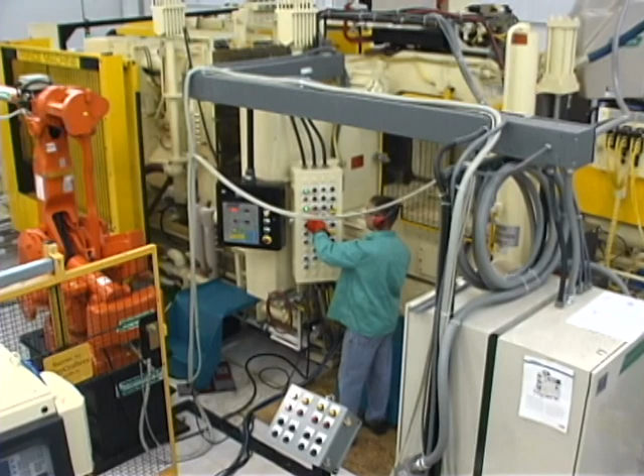This video has been produced and distributed by the North American Die Casting Association to assist in improving safety in die casting facilities. The injury rate for the die casting industry is approximately 2 times the rate of other private industries, as reported by the U.S. Bureau of Labor Statistics. Several hazards exist in die casting facilities that can cause serious injuries such as burns, slips and falls, strains and sprains, eye injuries, fractures, and cuts.

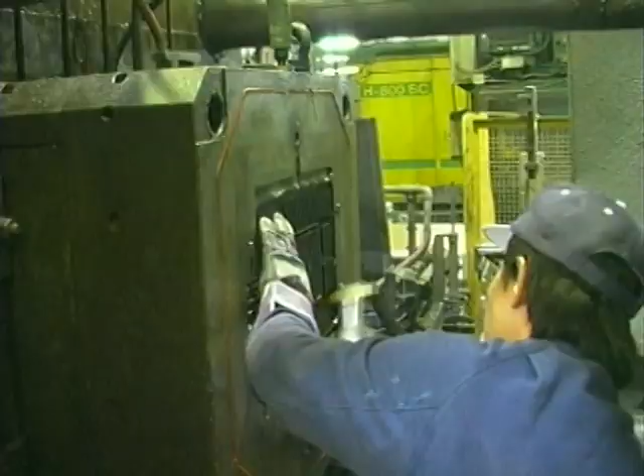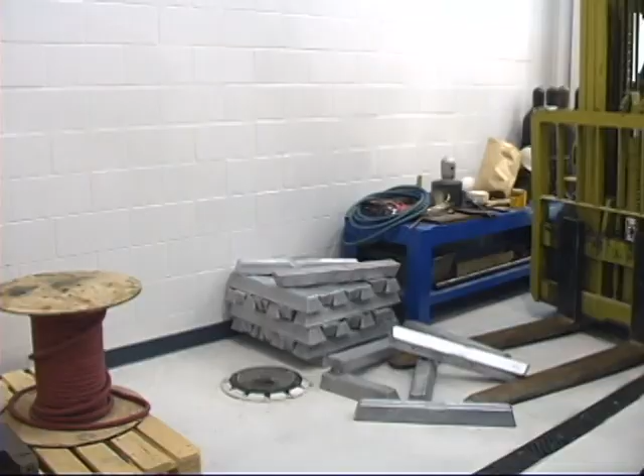You should pay very close attention to the detail presented in this video and follow all safety rules established by your plant to prevent injuries to yourself and others. Heat from molten metal, castings, die casting machines, die casting tools, hot oil, chemicals, flash from castings, the wrong mix of materials, poor housekeeping. Studies show 96% of all accidents are caused by unsafe acts, something somebody didn't do correctly. That means most accidents are avoidable.

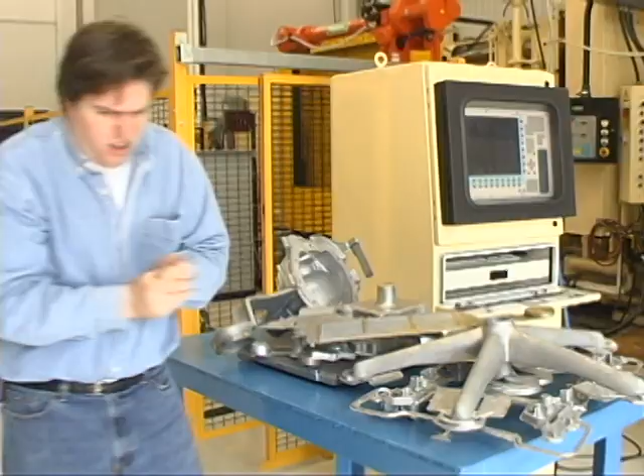Failure to perform your job in a safe manner isn't an option. There's simply too much at stake when you let safety slide. Safety is everyone's responsibility, and this video will help you do your part by providing communication on lockout-tagout procedures, personal protective equipment, metal melting and handling, die casting machine guarding, hazard communication, and housekeeping.

One of the worst die casting disasters of all time happened because safety procedures weren't followed. People died. People were seriously burned and injured, and people lost their jobs. More common to die casting operations, but no less important to avoid, are sprains and strains, bruises and cuts, fractures, and heat burns. Because simply, it's good business when everybody stays healthy and injury-free.

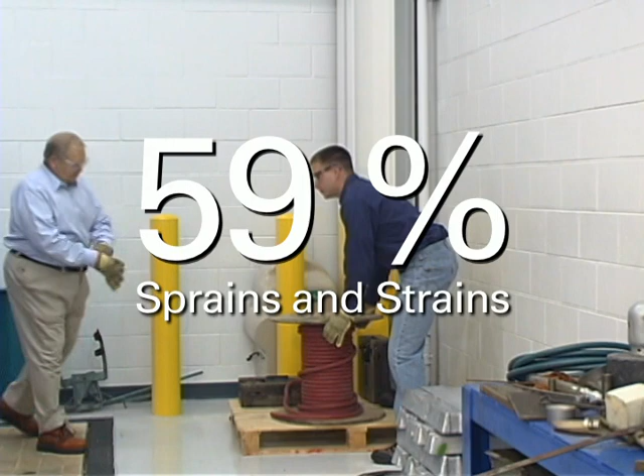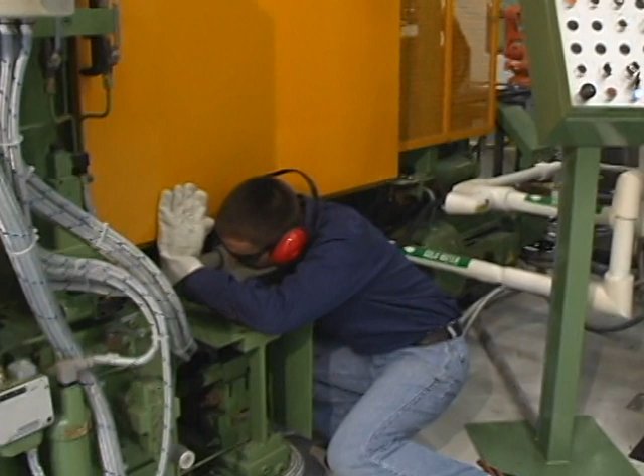Sprains and strains are usually caused by overreaching and improper lifting. If a job requires moving heavy material, ask for help and use the training you've been given to avoid sprains and strains. Bruises and contusions are often caused while using hand tools or by moving machine components. If you're working around moving equipment, keep your hands, arms, and body from harm's way. Don't place your hands or arms over, around, or through safety guards. And when handling castings that are heavy or have sharp edges, use caution and wear proper personal protective equipment.

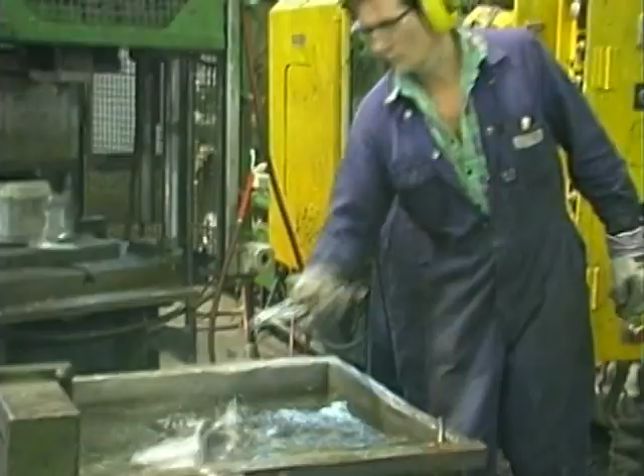Fractures are often caused by slips, falls, and moving equipment. That's why it's always important to keep your work area clean, organized, and free of water and oil. And use caution when you're working on equipment, especially above the machine platform, and don't reach around machine guards.

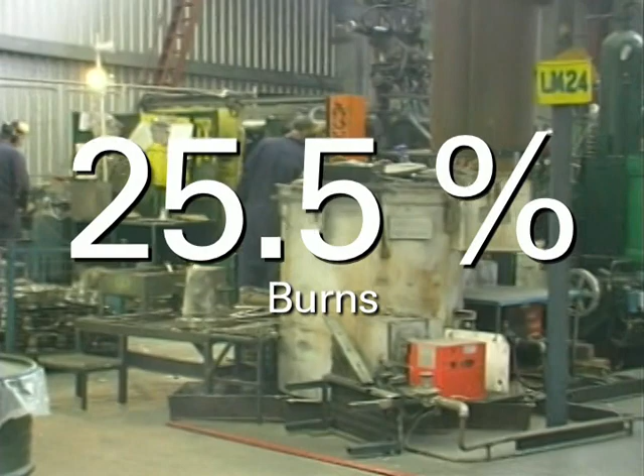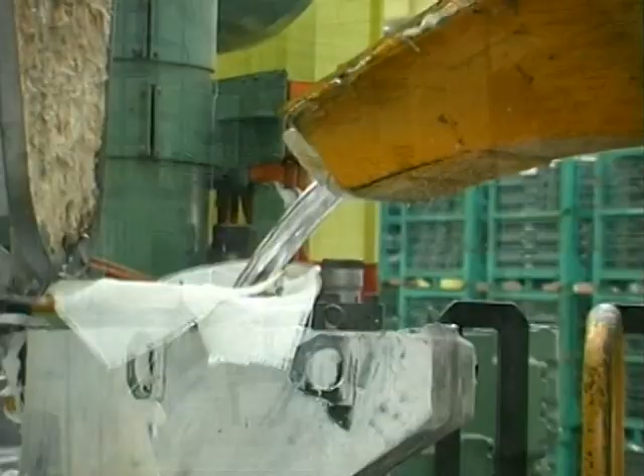Die casting dies, hot motors, hydraulic pumps, hoses and piping, molten metal holding furnaces, and transfer ladles get hot and can cause serious burns. Wear personal protective equipment when working with or around hot materials, and keep a safe distance from molten metal to avoid being burned from splashing metal. If you handle castings, wear the right kind of gloves. It only takes a moment for a serious burn to happen, so assume that all castings are hot, because you can't tell by looking at a casting whether it's hot or not.

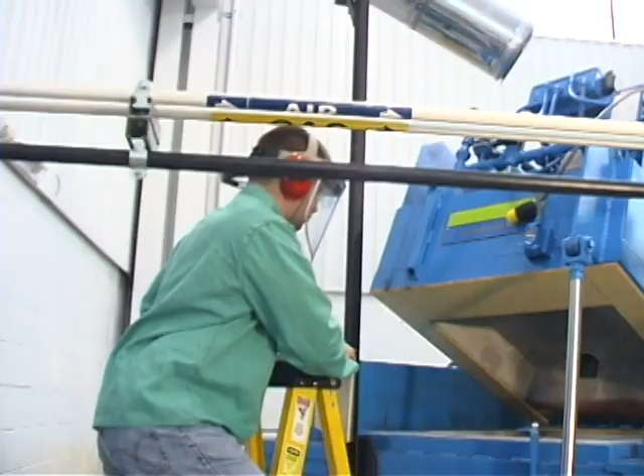Every employee in a die casting operation must be trained concerning the safety rules to work safely, to audit their work area for safety hazards. They should correct or report safety hazards and watch out for their co-workers' welfare. Identifying, reporting, and correcting unsafe acts and conditions greatly reduces the potential for accidents, injuries, and damaged property.

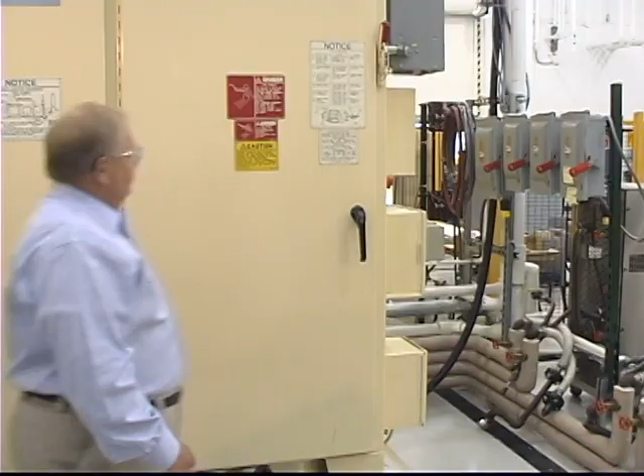OSHA's lockout-tagout standard helps ensure safety on and around powered equipment. This OSHA standard identifies 3 classifications that determine to what extent employees are affected by lockout-tagout requirements. Authorized employees are the ones who lock or implement a tagout system procedure on equipment for servicing or maintenance. Authorized employees must have thorough knowledge of the machines they work on and the lockout-tagout requirements that go with them.

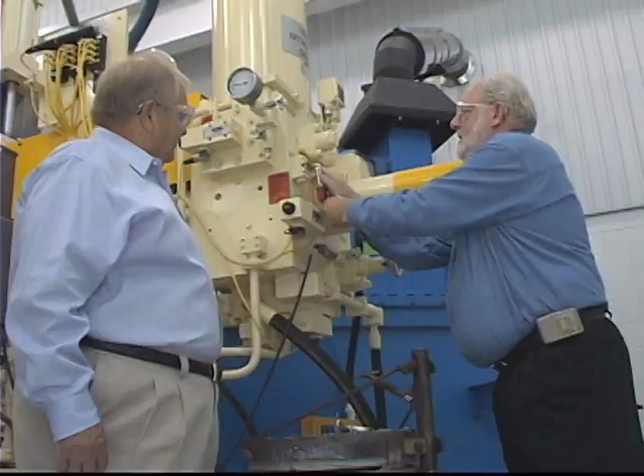The affected employee is one whose job requires them to operate or utilize equipment and understand lockout-tagout requirements to avoid hazards for maintenance personnel. Other employees are those whose work may require them to be in the areas where energy control procedures exist. They are not directly responsible for operating or performing maintenance on equipment.

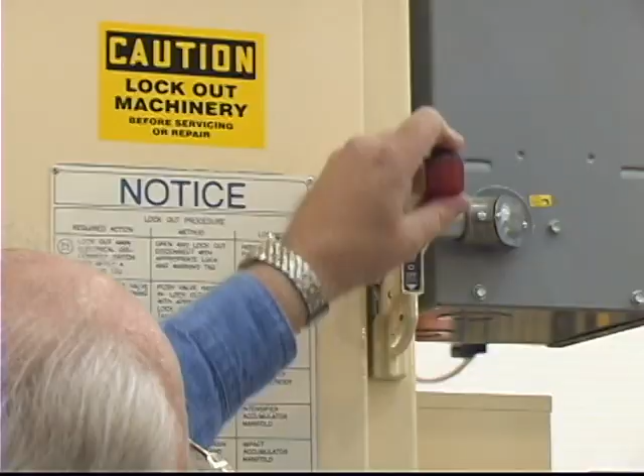Lockout is the preferred method of control and provides the greatest degree of protection for the employee working on the machine. If work is required on equipment that will not accept lockout devices, tagout is permitted. All lockout-tagout procedures must be followed even if no one is in the work area when the work begins. Many times, employees enter the work area after maintenance procedures have begun, and lockout-tagout procedures ensure that these employees do not accidentally energize the machine.

The fundamental rules that everybody must understand about general energy control procedures are that all equipment must be locked out or tagged out to protect against accidental or inadvertent operation, and that no one should attempt to operate any switch, valve, or other device that is locked out or tagged out.

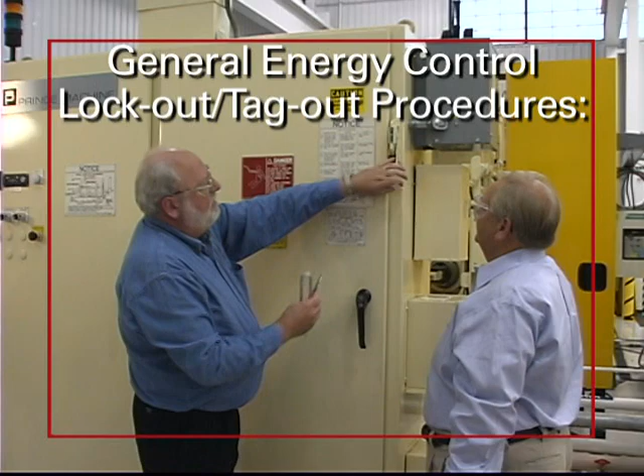To perform a lockout or tagout under the general energy control procedures: 1. Notify all affected employees. 2. Deactivate the equipment to be serviced using normal shutdown procedures. 3. Isolate the equipment from its energy source. 4. Lock out or tag out all energy isolating devices on the equipment.

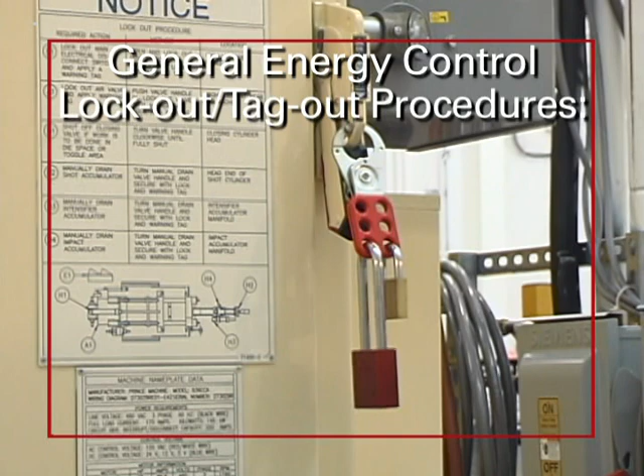5. If the maintenance procedure involves more than one person, each person must place a personal lockout or tagout device on the energy isolating device. For multiple locks, a multiple hole hasp must be used. 6. Make sure all personnel are not exposed to potential injury from the equipment. 7. Check the zero energy state of the equipment by attempting to operate the equipment to ensure that it will not operate. Return all controls to neutral or off after trying to operate the equipment.

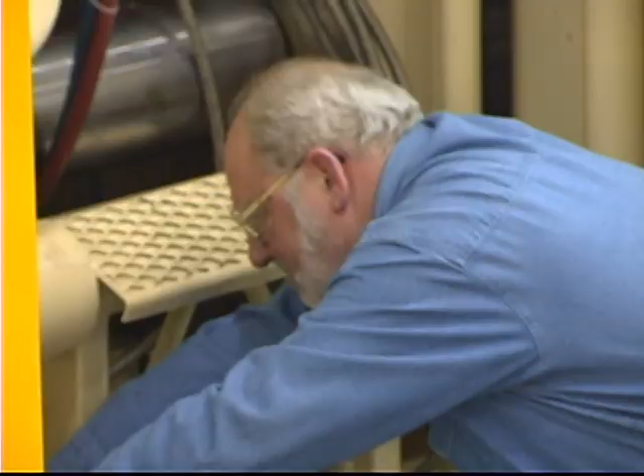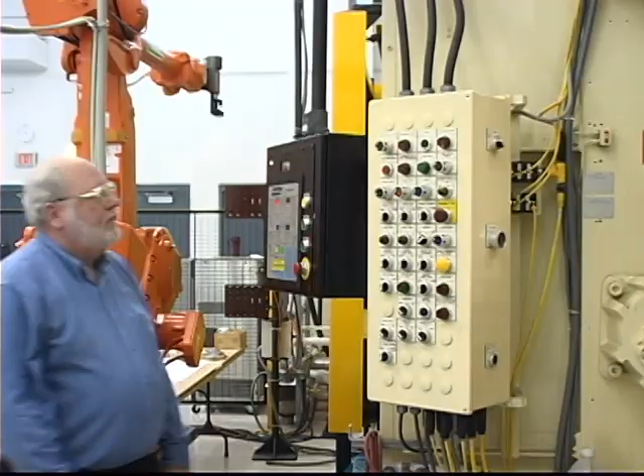When the service or maintenance job is done and prior to starting the machine, employees must first remove all tools and reinstall machine guards. Check the area around the equipment so that no one is in an exposed area. Remove all lockout-tagout devices, and operate the energy isolating devices to restore energy to the equipment.

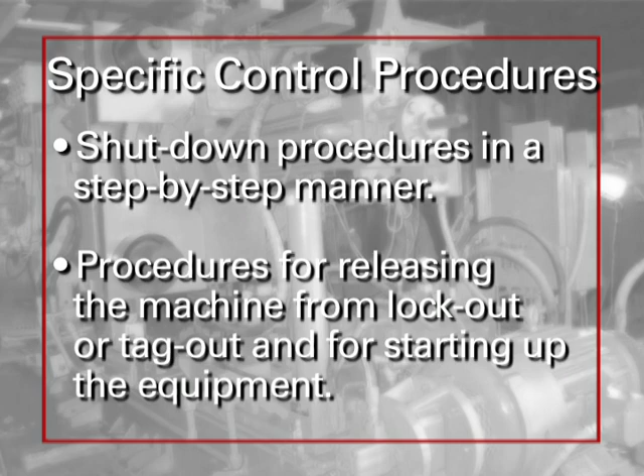Specific energy control procedures affect most equipment used in die casting operations. They include identity and description of each item of machinery or equipment, the listing and description of controls and sources of energy, shutdown procedures in a step-by-step manner, and procedures for releasing the machine from lockout or tagout and for starting up the equipment must be provided.

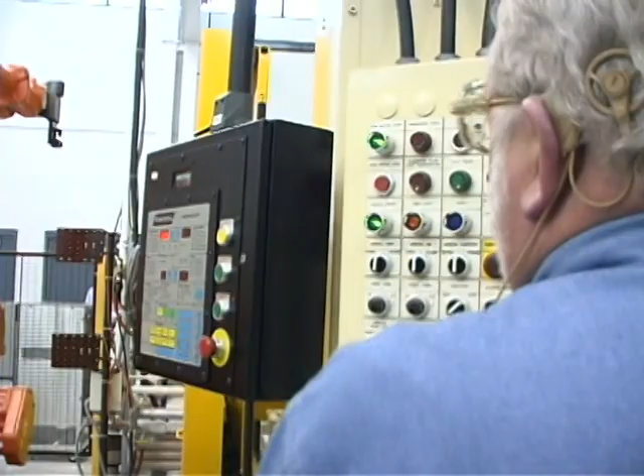Training on lockout-tagout procedures varies according to employee classification. Authorized employees must be able to recognize hazardous energy sources and the type and magnitude of energy at the job site, and how to isolate and control them. Affected employees must understand the purpose and the use of energy control procedures or equipment they operate, or where the energy source is located in their work area. Other employees should also be trained on energy control procedures for equipment they operate and be prohibited from restarting equipment that is locked or tagged out.

OSHA requires the use of personal protective equipment to help keep employees safe. Management and shop floor workers as well must understand what personal protective equipment is available and how to properly use it. Basic personal protective equipment that should be worn by everyone working in the die casting area of the facility includes safety glasses with side-eye protection.

Eye and face protection must cover the front and the side of the eyes and face and includes safety glasses, goggles, face shields, welding helmets, and full hoods. Employees who wear contacts or glasses must wear goggles or other eyewear meeting ANSI standards or prescription safety glasses. Face shields and welding helmets are considered secondary protection. They must always be used with safety glasses or goggles in order to provide adequate protection.

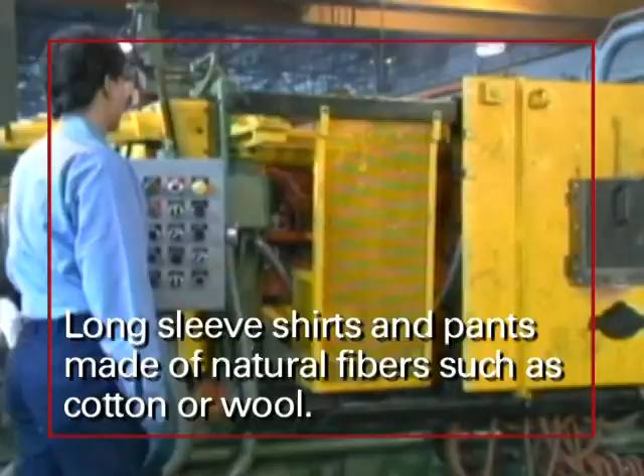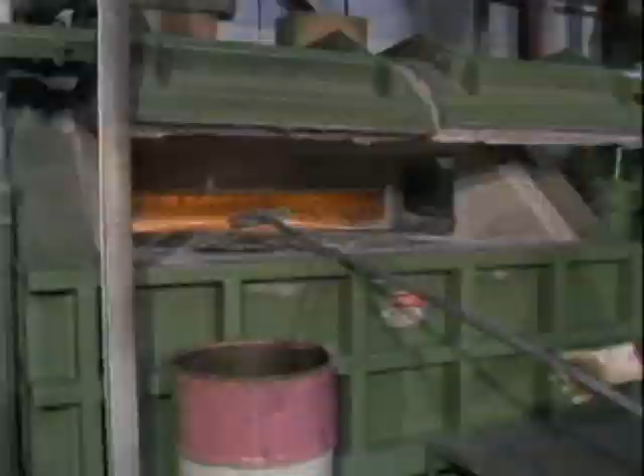Long-sleeve shirts and pants made of natural fibers such as cotton or wool, and steel-toe safety shoes. Hearing protection, hard hats, bump caps, and metatarsal protection may also be required for additional protection. Personnel handling and transporting molten metal may require additional specialized personal protective equipment, including leggings and spats for protection from sparks and burns, fire retardant or reflective jackets and gloves, hard hats with face shields to deflect intense heat and flying debris. It's essential that each employee also avoids contact with gloves or boots that have been used with hazardous chemicals. All new employees must be trained on proper use and maintenance of personal protective equipment.

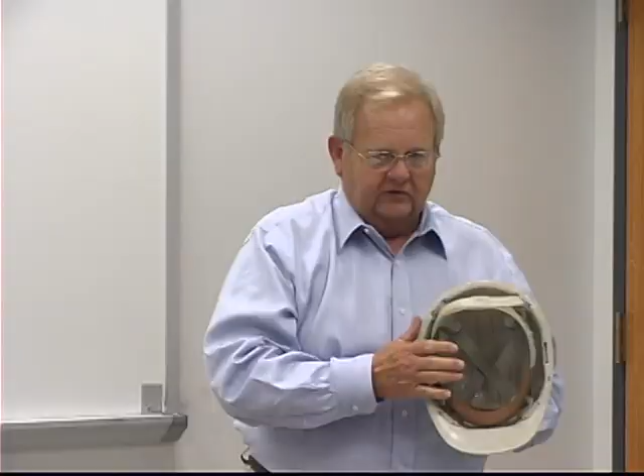Head protection is also required in die casting facilities. Hard hats consist of an outer shell and inner suspension. The shell provides resistance to impact and penetration of a falling object, and the suspension acts as a shock absorber to keep the shell at least 1 inch above the wearer's head in the event of impact. The bump hat is a metal, plastic, or fiberglass cap shaped like a hard hat, but without a suspension system, so it does not provide adequate protection from falling or sharp objects.

There are 3 things that every employee should know about head protection. First, hard hats should always be inspected daily and always after an impact. The shell should be solid, with no cracks or obvious damage. The suspension should be checked for worn, torn, or broken straps or connectors. The shell and suspension should be cleaned regularly so they can be properly inspected.

Employees should not put stickers or paint on a hard hat. These changes make it more difficult to see any flaws in the shell. Store hard hats away from heat, impact, chemicals, or sun exposure. Don't put them in the back window of a vehicle or behind the seat of a truck due to possible impact damage.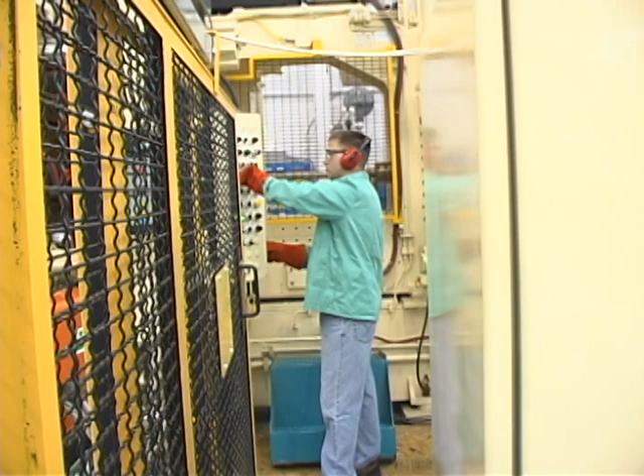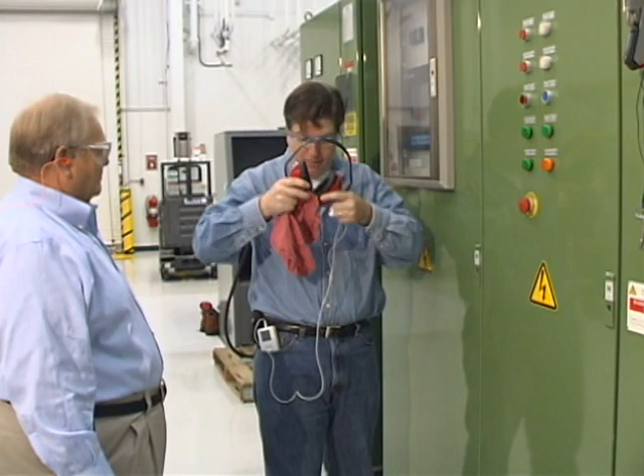Hearing protection may be a requirement in your facility. The two general types of hearing protection available are earplugs and earmuffs. Earplugs are ideal. They fit into the ear canal and provide a snug cushion against noise. Earmuffs are also effective at blocking out harmful noise. They create a sealed space around each ear, but hair, earrings, and eyeglasses can get in the way and limit their effectiveness. Personal stereos with headphones are no substitute for hearing protection and should not be used. Hearing protection should be inspected daily and be cleaned, repaired, or replaced as needed.

Foot injuries in die casting can be common and quite debilitating. Protective footwear made with a steel reinforced box toe protects the foot from being crushed. Safety shoes and boots should also have puncture-resistant soles. Work around chemicals may require rubber or synthetic footwear.

Toe caps, foot guards, and heel and ankle shields are also available for use in areas of work requiring extra protection. It's important to check safety shoes on a daily basis for wear, cracking or drying of leather, damage to grommets or fastenings, and damage to the soles. If shoes have steel toes, check inside the shoes to be sure the metal is not protruding from the lining.

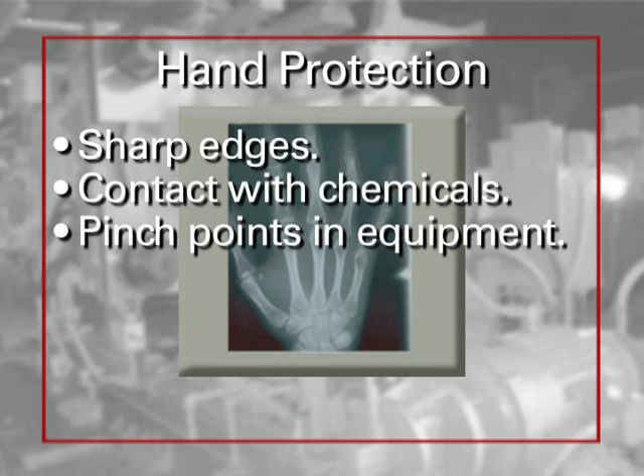Hands, fingers, and arms are injured more often than any other body part. The causes for those injuries include sharp edges, contact with chemicals, pinch points in equipment, abrasions, temperature extremes, and contact with electricity. Like footwear, proper fit is important with hand protection to allow for full movement and dexterity. Precautions to take when choosing the right hand protection include taping the top of the glove or sleeve or folding it to form a cuff to prevent chemicals from running down the arm and inside the glove or sleeve.

Vinyl, rubber, or neoprene gloves are good for use with most chemicals. A synthetic glove is required when working with petroleum-based chemicals. Metal reinforced gloves provide the best protection from sharp points or edges, but do not wear gloves containing metal when working around electricity or electrical equipment. Leather or cotton gloves are best for handling abrasive materials. Avoid using gloves when working around machinery, as moving parts can easily pull a hand and arm into the machine.

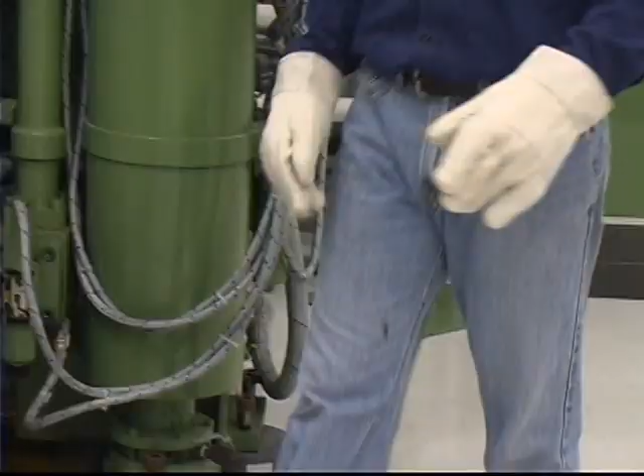Remove gloves or sleeves to avoid contaminating skin, clothing, or surroundings with anything on the outside of the glove or sleeve. Always inspect hand and arm protection daily. Look for holes, splits and seams, evidence of corrosion, or other evidence of wear and damage, and replace damaged gloves immediately.

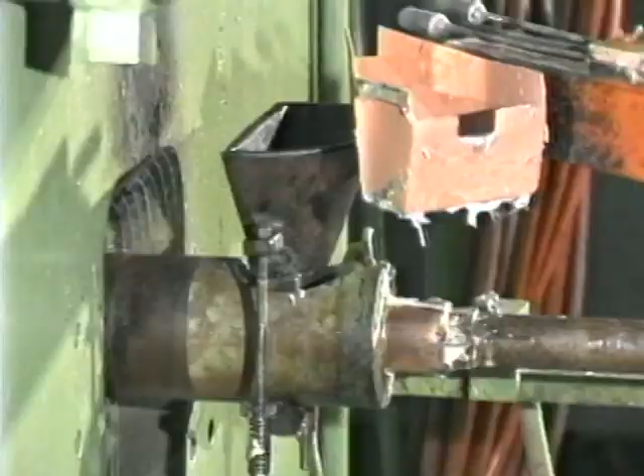Safe work habits are essential to all personnel, especially for those who work with the handling of molten metal. Handling and transporting molten metal can be very dangerous. Reverberatory furnaces hold large quantities of molten metal, from 2,000 to as much as 100,000 pounds. An explosion in one of these furnaces, caused by water or other liquid submerged in the metal bath, can cause a disaster. One of the worst die casting disasters of all time happened because safety procedures weren't followed.

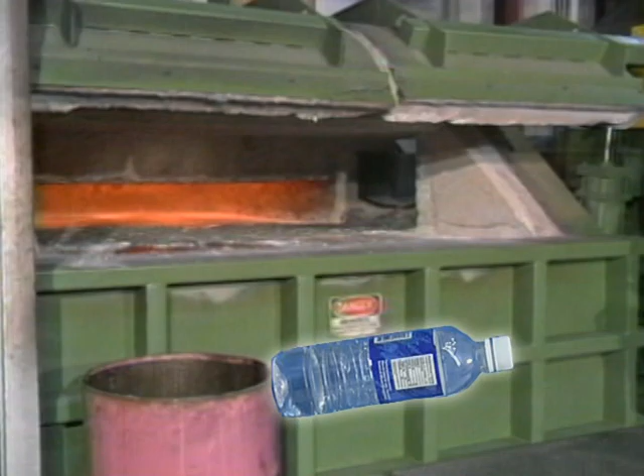In this explosion, a 230-foot-long manufacturing facility was reduced to rubble in minutes. This accident was caused when a closed container of liquid found its way into a scrap casting hopper, which was then deposited into a reverberatory furnace for remelting. The container of water, submerged beneath nearly 50,000 pounds of molten aluminum, expanded 2,500 times. Changing to steam, the water vaporized the molten aluminum, resulting in a massive explosion.

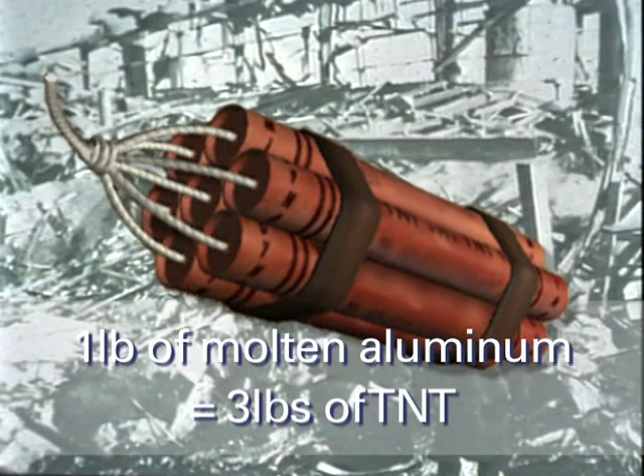1 pound of molten aluminum has the explosive capacity of 3 pounds of TNT if water becomes trapped beneath it. That's a worst-case scenario. This furnace explosion resulted in the death of 2 workers. 14 others were seriously injured. The explosion was heard 55 miles away. Here's what was left of the plant the next day.

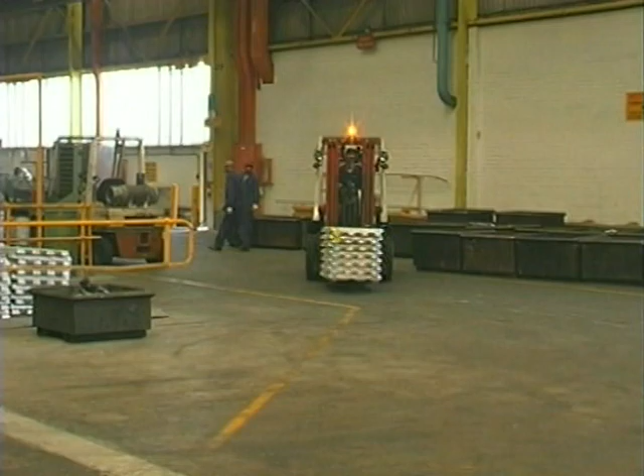Proper storage and handling of raw materials such as scrap, ingots, sows, and fluxes is critical. Die casting metals must be moisture-free before being charged into a melting furnace. Safety rules for working with molten metal must be established and rigidly enforced. Never charge anything wet into molten metal. Materials to be melted should be preheated to evaporate any moisture on the surface or trapped inside the metal. No plastic bottles, water-based fluids, cans, or aerosol stored or used around molten metal or furnaces.

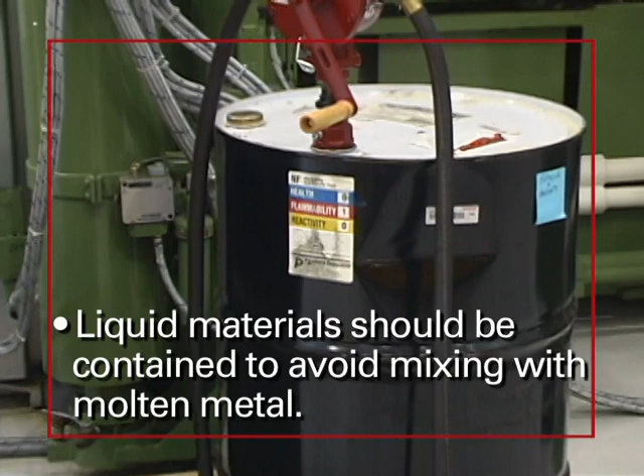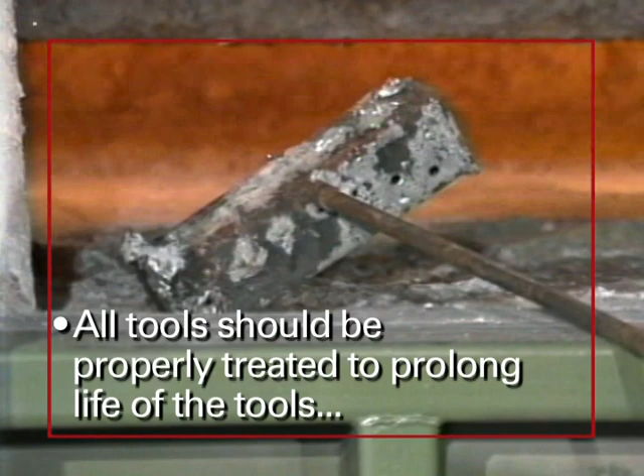Hydraulic and lubricating oils, die lubricants, water, and other liquid materials should be contained to avoid mixing with molten metal. All tools used for working with molten metal should be properly treated to prolong the life of the tools, to prevent contamination of the molten metal, and preheated to at least 300 degrees Fahrenheit before usage to eliminate moisture from the tool. The coating should not contain calcium, which reacts with molten metal.

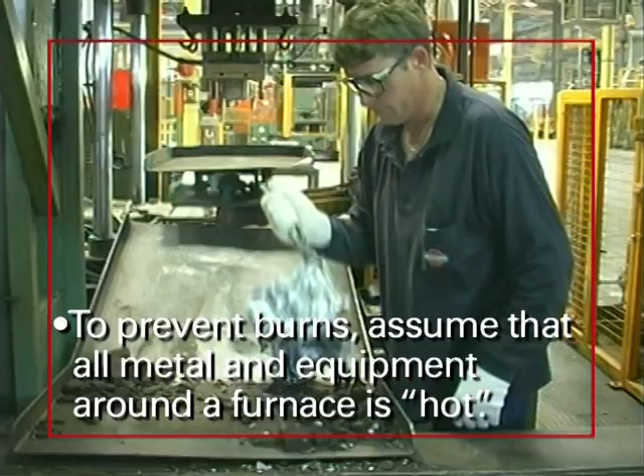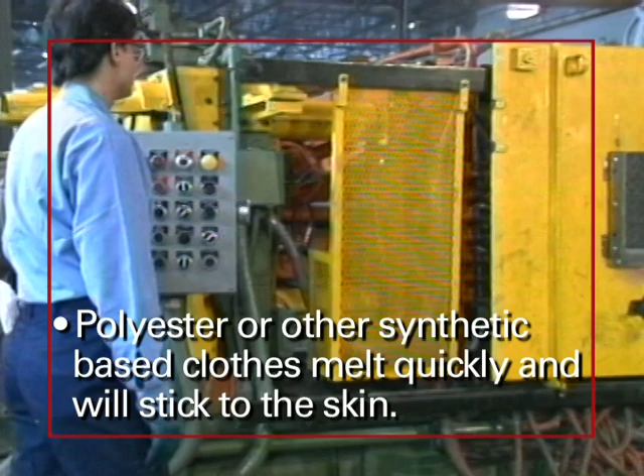Scrap materials, sows, and ingots should be preheated to a minimum of 800 degrees Fahrenheit prior to being introduced into molten metal baths. To prevent burns, assume that all metal and equipment around the furnace is hot. Safety glasses with side shields must be worn. Safety clothing must be made of natural fibers such as cotton or wool. Polyester or other synthetic-based clothes melt quickly and will stick to the skin. Aluminized coats, gloves, spats, and leggings, heat-resistant gloves, and fire-retardant jackets should be worn at all times, along with hard hats and face shields.

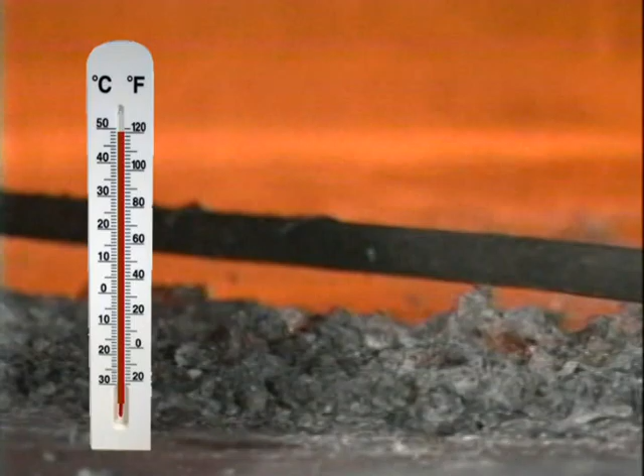Beware of heat exhaustion. Melting furnace areas can reach 120 degrees Fahrenheit. Know the symptoms of heat exhaustion and take proper precaution to avoid this condition. Don't risk having an accident, and seek medical attention if you experience the symptoms of heat exhaustion. Toxic substances can exist in the die casting workplace. In metal melting and holding furnaces, zinc, lead, tin, and fluxing chemicals create toxic fumes. Training in toxic substance handling is mandatory. Employees should avoid breathing furnace fumes.

In 1974, OSHA adopted machine guarding regulations. The standard requires that any machine part, function, or process that may cause injury must be safeguarded to protect employees. Machine parts that rotate, slide, change elevation, or intersect with other parts of the machine. In a nutshell, if it moves and could cause injury, it must be guarded.

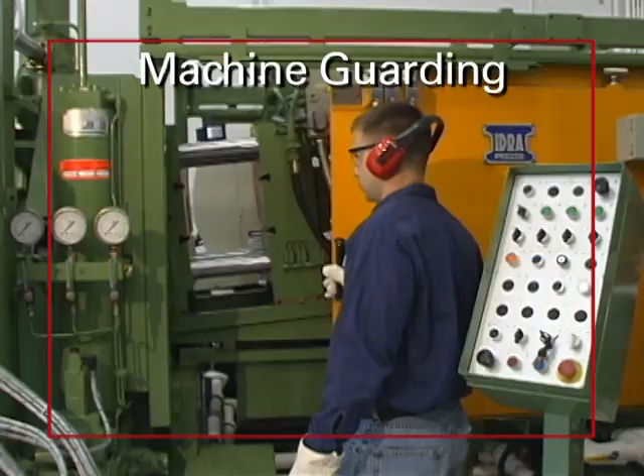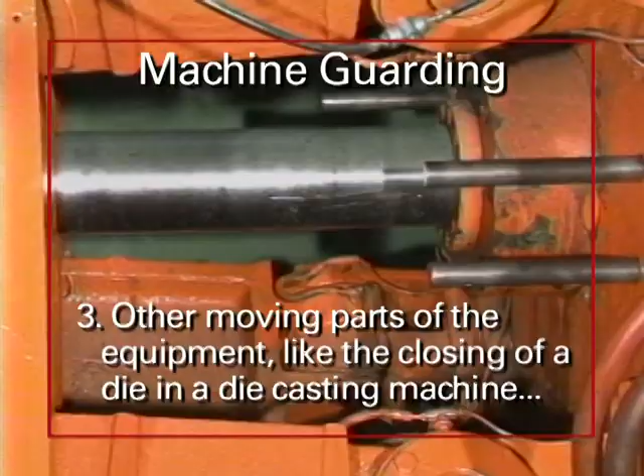There are 3 areas on a machine that create a hazard. The point of operation where the work is done, such as casting, cutting, shaping, boring, and forming. The power transmission apparatus is the device that transmits power to the machine. Flywheels, pulleys, belts, couplings, spindles, chains, cranks, and gears are typical components. Other moving parts of the equipment, like the closing of a die in a die casting machine and the shot cylinder, moving to force molten metal into a die.

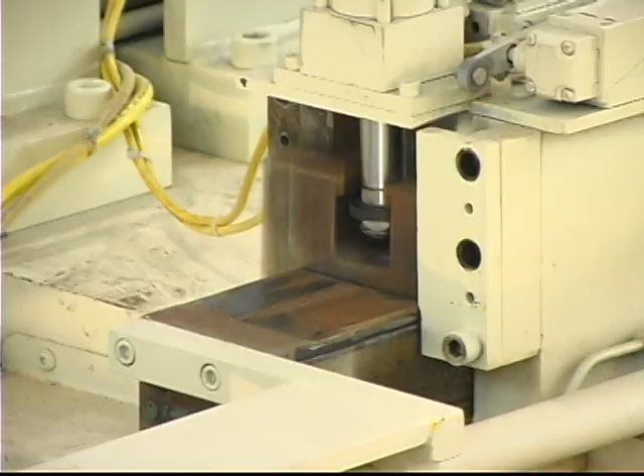There are several hazards inherent in die casting machines that must be guarded, like the toggle linkage, which moves the die open and closed and provides locking tonnage prior to metal injection. The injection sleeve and tip, which provides the power and speed required to inject molten metal into the die. The safety ratchet prevents the machine from closing inadvertently. The operator's door, which shields the operator from hazards during the metal injection portion of the cycle.

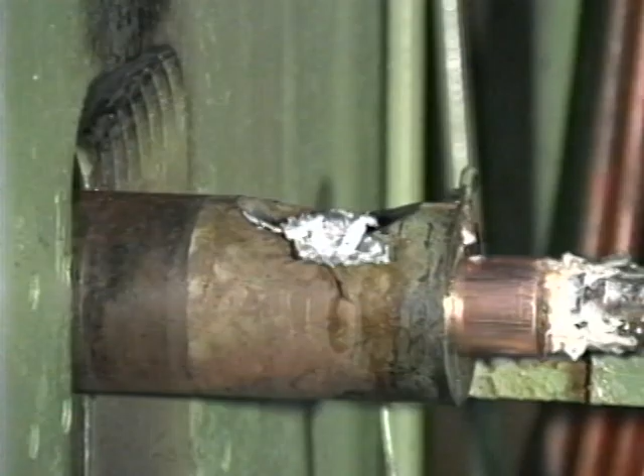In a horizontal cold chamber die casting machine, molten metal, ladled into the pour hole of the shot sleeve, may splash onto the shot sleeve and freeze. An operator should never attempt to brush away these drippings with his hand or place his finger in the pour hole. Metal drippings must be removed with a tool, such as a metal scraper.

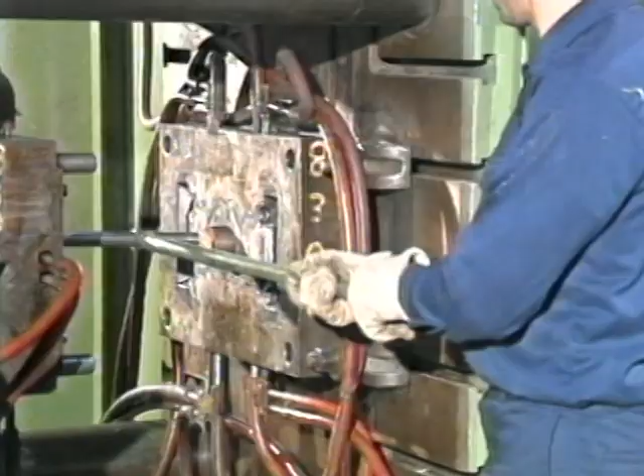Occasionally, the injection plunger tip of a cold chamber machine will seize in the shot sleeve. There are safe procedures for removing the stuck plunger, and they must be adhered to even if they are time-consuming. Fixture designs can be implemented to safely hold a bar between the die halves to force out the stuck plunger. Placing a pipe between the open halves of the die and holding it with your hand while closing the machine to force out the plunger tip is an unsafe procedure and must not be used.

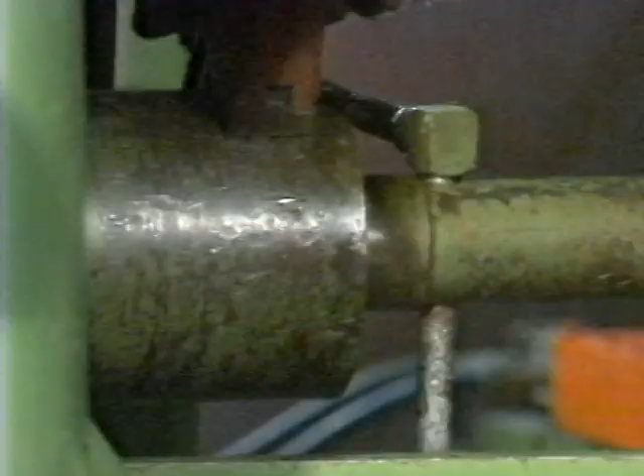If no provisions have been made for safe removal of stuck die plungers, shut the machine down to a zero-energy state with the die open to remove the cover half of the die. Disconnect the plunger rod, remove the cover half of the die, and remove the plunger, rod, and shot sleeve. A removable retainer will ease the removal of the shot sleeve to access the stuck plunger without the need to remove the cover half of the die.

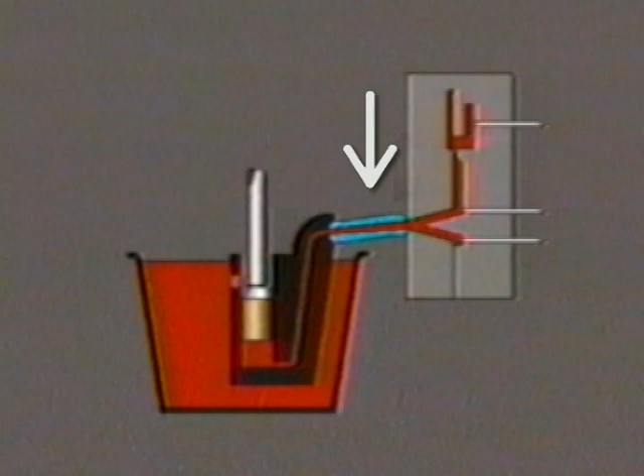Hot chamber die casting machines use a nozzle called the gooseneck to transfer molten metal from the pressure chamber to the die. Excessive pressure can deform the sealing gaskets at both ends of the gooseneck and can cause the nozzle to leak. When this leakage occurs, the molten metal may spray out of the nozzle, creating a burn hazard.

Molten metal can spit from the die parting plane at a high velocity during metal injection. Safety gates and operator doors should be installed and properly maintained on all die casting machines, and spit guards mounted on the die block will stop the flying metal.

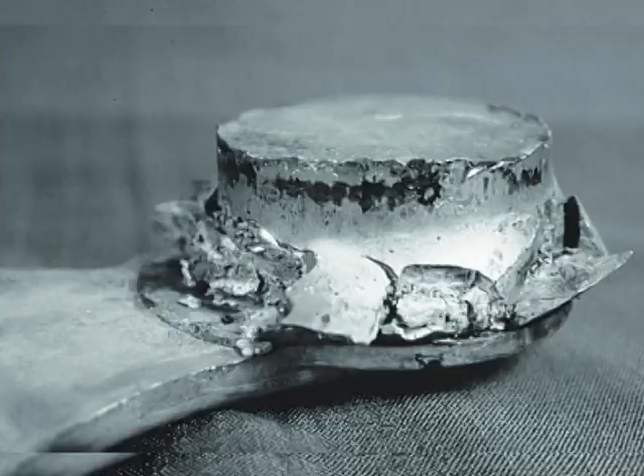A bursting biscuit occurs on a cold chamber machine if the metal in the die is not adequately solidified when the die opens and while the plunger continues to apply pressure to the biscuit. The explosion will send molten metal around the machine and can cause severe injuries. Properly designed and installed safety doors guard against this hazard. Safety doors should also be interlocked to the machine operation to prevent opening until the die has opened.

An operator's door prevents entry to the machine when it's operating and protects the operator from metal spitting at the parting line. Closing that door should be easy, and the leading edge of the door should have a sensing device to stop or reverse the door if it strikes something while it's closing.

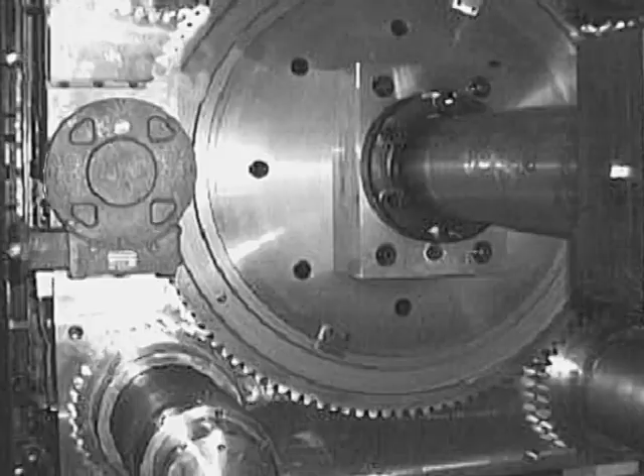The safety ratchet has a notched bar that moves with the moving platen or toggle crosshead and prevents accidental movement of the die casting machine closing system. The safety ratchet is normally on top of the machine, so it is a hazard only when someone climbs on the machine. Die casting machines also have chain or gear drives that must be guarded during machine operation.

There's a space between the mechanical bumper pin plate and the movable platen that can present a dangerous pinch point. Normally, the linkage area guards will protect this pinch point, but during die installation or adjustment, the machine must be shut down and placed in a zero energy state.

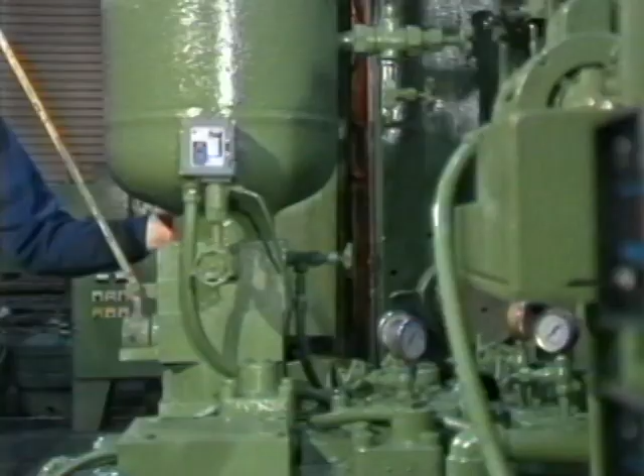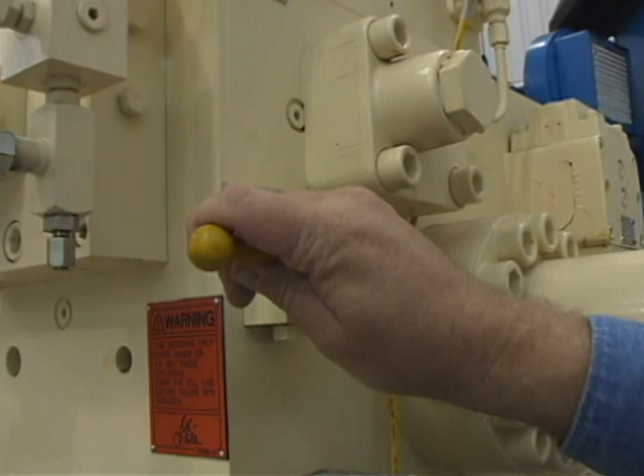The injection hydraulic and die closing cylinders of a die casting machine are usually operated with an accumulator hydraulic circuit. Since the accumulator is under extremely high pressure, a leak or a shift of the valve could cause the cylinder to move unexpectedly, even when the machine is locked out or the pump is off. Newer die casting machines automatically depressurize the accumulator when the machine is shut down. It's essential that procedures be adopted to put the machine in a zero energy state condition before any type of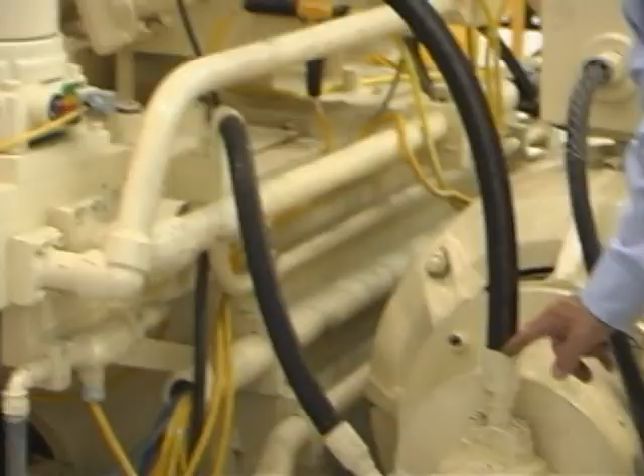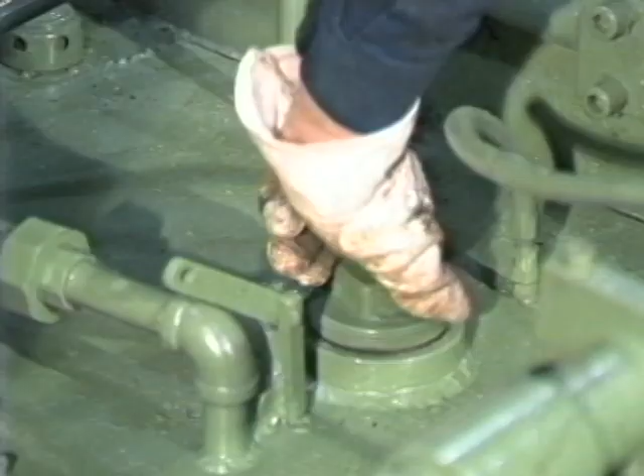maintenance work is done. High-pressure hydraulic systems on die casting machines also utilize special hoses. These hoses should be regularly inspected for wear and, when required, replaced with equal quality hose material. Pad hoses that rub against each other or against other parts of the machine to prevent abrading. Restraining these hoses with chains or other means prevents hoses from whipping around if they were to ever break or rupture. And even though modern hydraulic fluid is fire-resistant, it's not fireproof. When hydraulic fluid comes in contact with high-temperature sources, such as molten metal, it can burn.

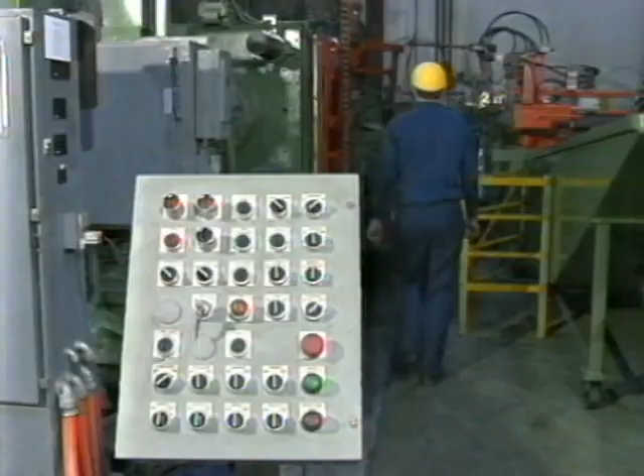All machines should be equipped with dual-button close controls that require the operator to start the machine using both hands. If the machine controls are mounted on a movable pedestal, the pedestal should be far enough from the opening and closing of the machine to prevent the operators from entering the die area while manipulating the controls.

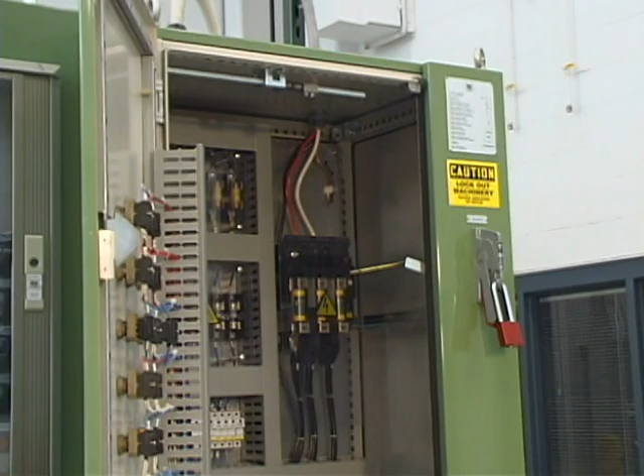Electrical controls like open electrical boxes and loose conduit connectors can also be hazardous to employees. Electrical control panels have interlocks for protection from high voltage. It may be necessary to bypass the interlock for troubleshooting with management approval and safety precautions, but never deactivate limit switches or interlocks without proper approval. Electrical safety should always be a priority in any operation.

Only qualified personnel should be allowed to work on electrical systems. Arc flash and electrical shock can severely injure and kill employees who don't follow electrical safety standards. Varying types of electrical gear and clothing are required to protect the individual performing these operations. Before any electrical work is started, the machine must be locked out and/or tagged out, and the machine placed in a zero energy state condition.

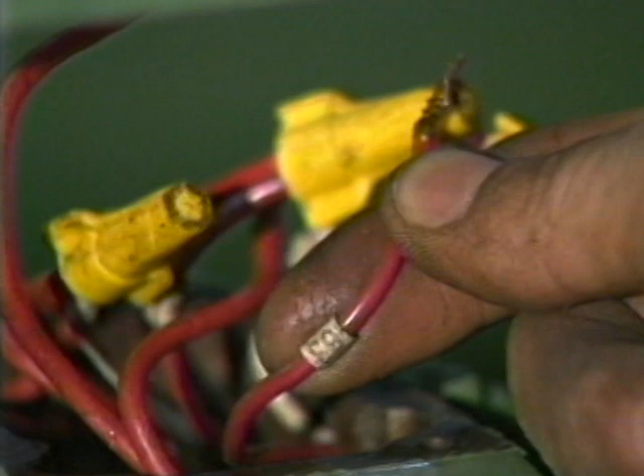Changes should not be made to a wiring layout without full prior consultation with the machine builder. When a wire is disconnected, it must be identified with a tag to avoid improper reconnection. If disconnection is temporary, wires must be guarded and disconnected from feed wires. Simple changes to an electrical layout can result in extremely hazardous conditions when the machine is powered up.

All electrical tools must be grounded or double insulated. Check for loose electrical conduits and fittings, and for broken or frayed wires. Personnel should not use flexible or rigid electrical conduit as a stepping or standing place.

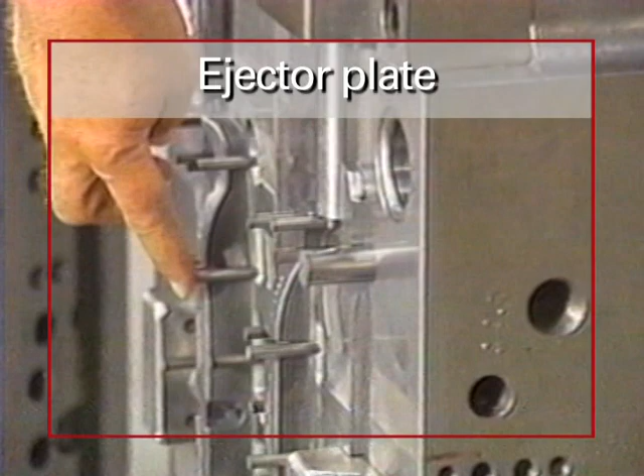Die casting dies can be very complex with many hazards, such as the ejector plate of the die, which moves the ejector pins forward to eject the casting from the die. This motion can create several pinch hazards under several circumstances. Die parting spit, which occurs when molten metal leaves the die cavity at high speed. Core cylinders and slides, which present motion and pinch hazards as the die opens and closes. Angle pins, which can create snag and pinch hazards while the die is in operation.

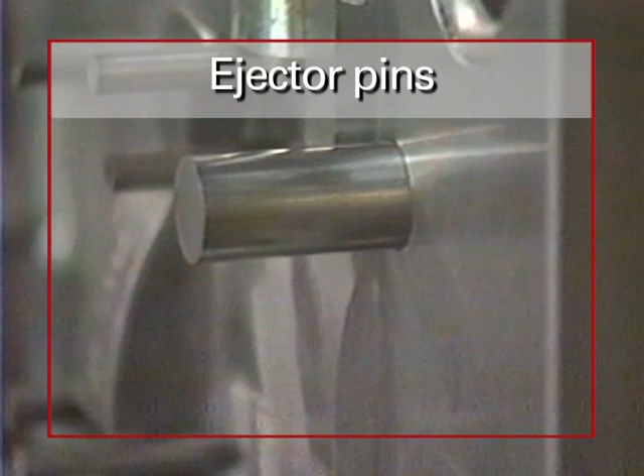Ejector pins, which can snag clothing or cause lacerations to the operator who is working in or on the die. Stuck castings. Cast-in inserts, which must be placed manually in the die while it is in production and while the die is hot. Core slide springs, which are compressed as the die closes and create potential energy that can present hazards.

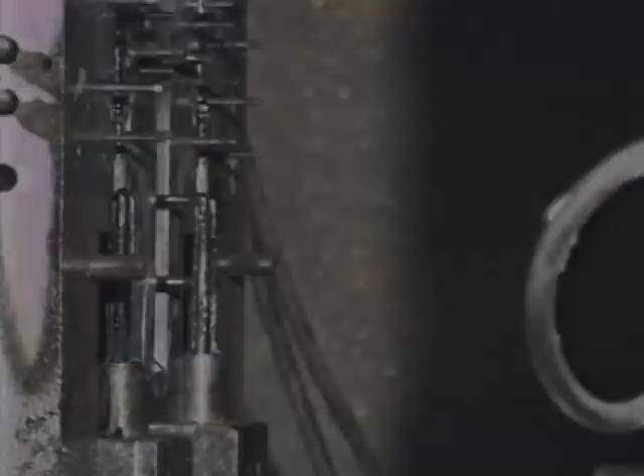Whenever entry into the immediate die area is required, the machine should be placed in a zero-energy state by turning off the main power, blocking the die open, blocking or removing the injection ram on hot chamber machines, and depressurizing the accumulator and the machine.

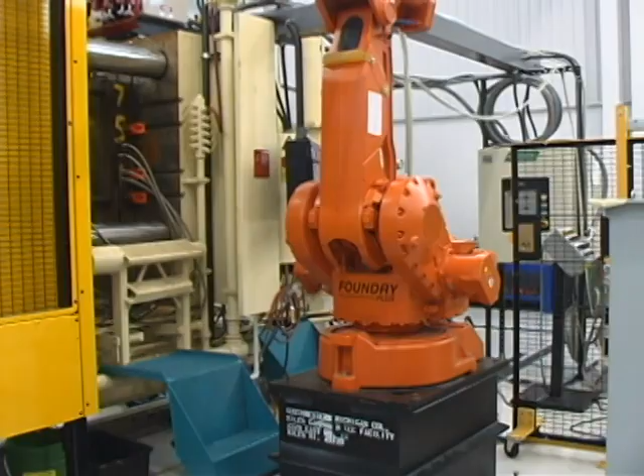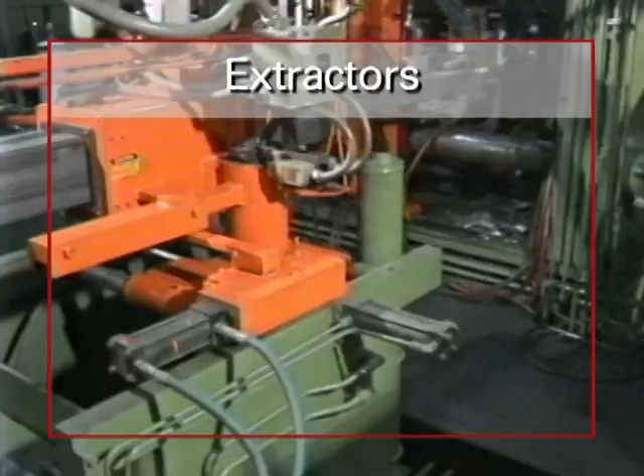Many types of auxiliary equipment are used in modern die casting operations, sometimes as part of a die casting cell, where pieces of equipment are interlocked and function as an integrated production system. Areas to pay attention to in order to ensure safe operation include the mechanical ladle area, hydraulic trim presses used to remove flash, gates and runners from the castings, and extractors, which move parts out of the die casting machine and into other post-casting operations and have mechanical extracting arms that swing vertically and horizontally. Personnel should not enter these areas when the equipment is operating.

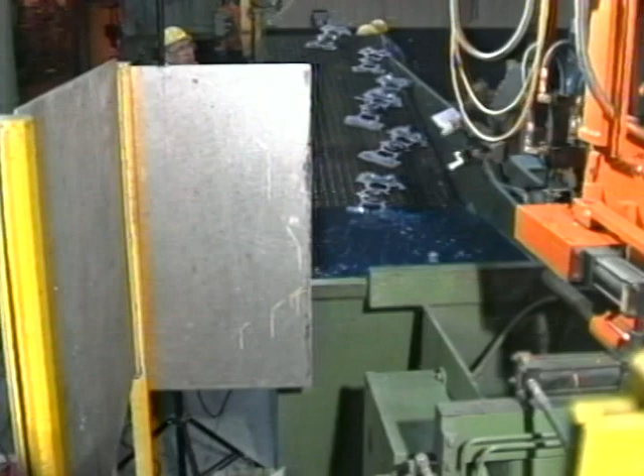A gate for entry of setup and maintenance personnel must be interlocked with the machine control circuits to stop the machine when the gate is opened. Pits are fall hazards and must be properly guarded. Conveyors have a variety of pinch or snag hazards and obviously should never be ridden. Only authorized employees who have been thoroughly trained should use cranes and hoists, and it's best to use a spotter to watch